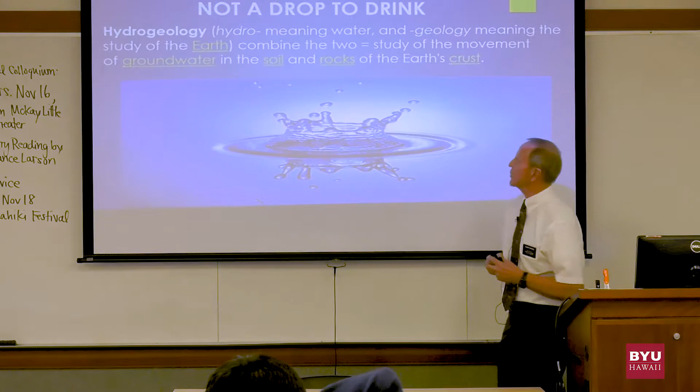Hydrogeology, as far as the definition, hydro is water, geology is earth. So what we're going to talk about today is the movement of water inside the earth.

When Heavenly Father and our Savior created this earth, there was also a lot of planning regarding storing water somewhere usable, in a different form and shape than we're typically used to. So let me go back here.

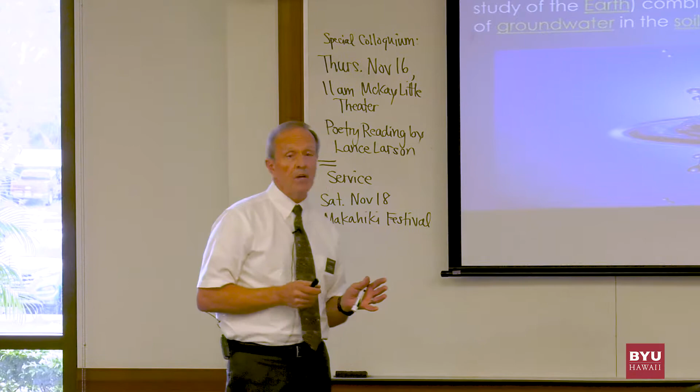Water, water everywhere, not a drop to drink. We have oceans that constitute 80-something, 90% of our water, and that's not really available for all the different uses we have, so we have to have other sources. What happens is we go to underground reservoirs, and we also have surface water.

Here's some terms I want you to remember: cone of depression, water-bearing formations, and drawdown. That will give you some real insight as far as when you're working with underground water, which we call groundwater.

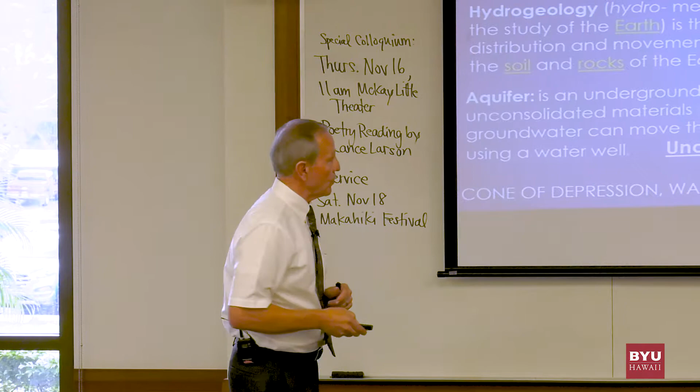There are two main sources of water. You have surface water, and you're all familiar with that because you've been around lakes and rivers and so forth. Then as we go down into the Earth's surface, we have the opportunity to work with groundwater. Groundwater is located under the ground, obviously, with large aquifers.

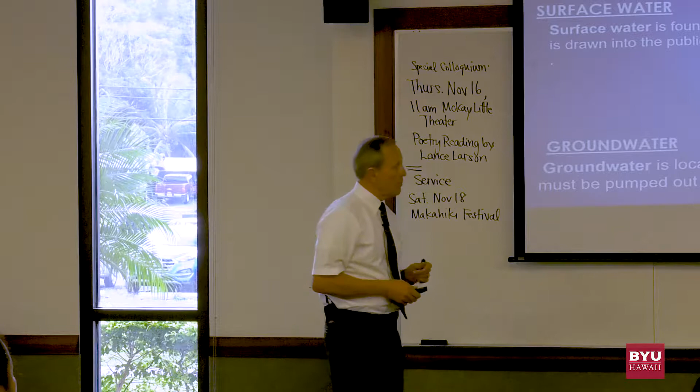You need to be aware of what an aquifer is. Basically, the only way we extract this water typically is by drilling wells into the aquifer and extracting it through a pump. And that's the other issue.

What happens, people, is you have a top layer, then you have your actual aquifer, and then you have maybe bedrock or something they'd call a confining layer. A confining layer keeps the water in a certain place. If it's not confining, that water is going to move wherever it wants to. It doesn't move very rapidly—it can take hundreds of years to move a few miles.

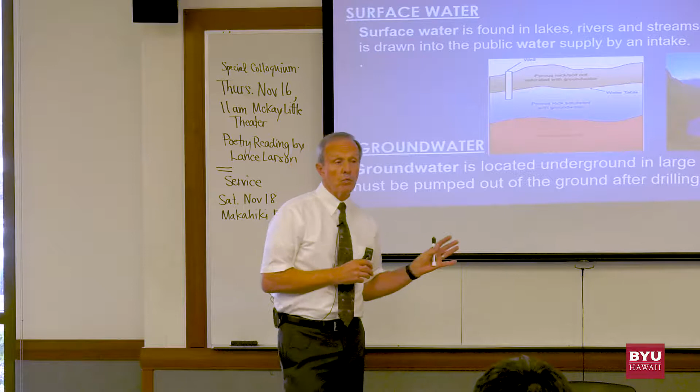This water is stored in the earth in an aquifer, and it moves based on the porosity. What's the porosity? It's how big the openings of the fractures are that the water is stored in. If you have large openings, the water is going to move rapidly, comparatively speaking. If it's real fine, or if you have clays, that's a confining layer—it cannot move through that formation, or it moves very slowly.

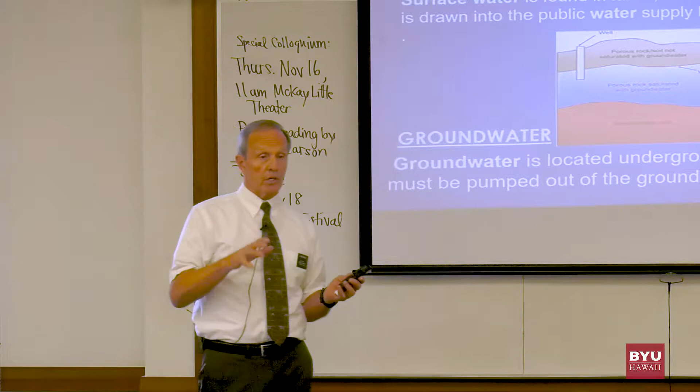So these are things you have to be aware of as you start. What happens in environmental engineering is you have a contamination source. Maybe if you have a plant over here and a plant over here, and all of a sudden this groundwater is contaminated, you have to go and do the forensic type work and say, who is the polluter?

Well, you have to do that. You have to know a lot about the formation. You have to know about the groundwater. You have to know which way it's going to flow or not flow. And then you have to look at the contaminant source—is it going to come from this plant or this plant? A lot of these things are really interesting, because then you get into the legal aspect of it.

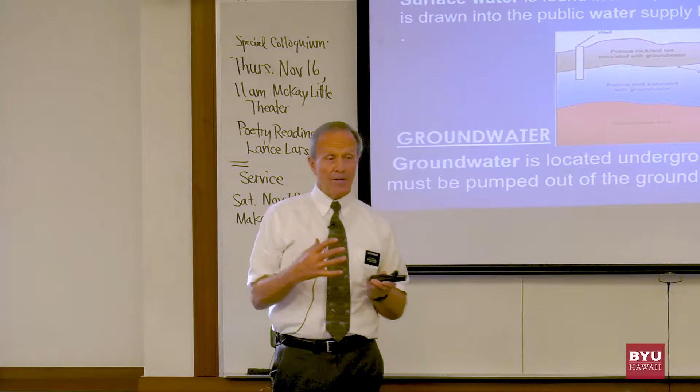You ever heard of EPA? Okay, guess what—who gets to pay? The deep pockets. They go for the people who have the money, because if you have the money, then you can do the remedial action. You can go in there and clean up the source. You can do the remediation to get that source back out of the groundwater, get it clean again, and then go forward.

So let's look at this as far as groundwater. What happens is you have the hydrogeological cycle. Basically, we never lose water, people—it stays here. But what happens is it transforms from one source to another, something that's going to confine it or store it.

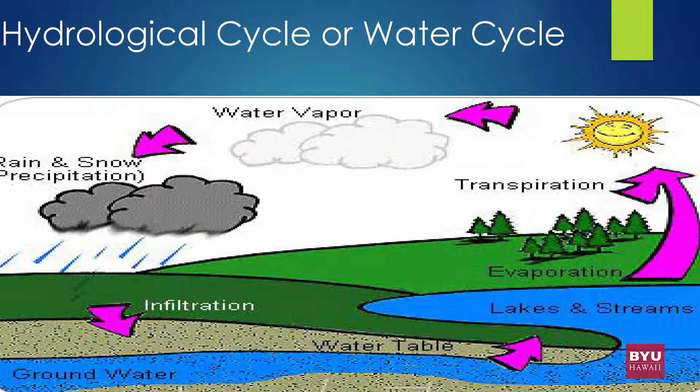We're all familiar with rain and snow, the precipitation comes down, and then infiltration happens. In Hawaii you probably have one of the greatest water sources there is, as far as clean, usable water. Why? Because this filtration is made up of volcanic rock, and as water goes down through this formation it trickles through and gets cleansed.

So it's rainwater. You have a great source anyway, you have a filtration system, and now you have this water stored here, and all you have to do is extract it. That's a great situation where you're living. The water source is fantastic for purity, it's available, and you have large quantities of it. That makes it nice.

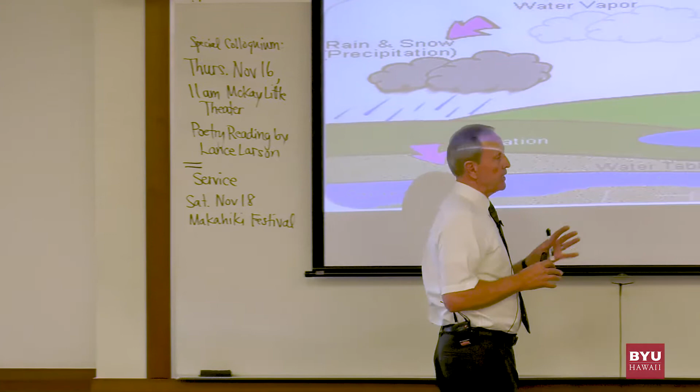Let's talk about some type of water movement where it's actually visibly seen and it starts flowing. What's that called? It's artesian. You ever heard of an artesian well or artesian source?

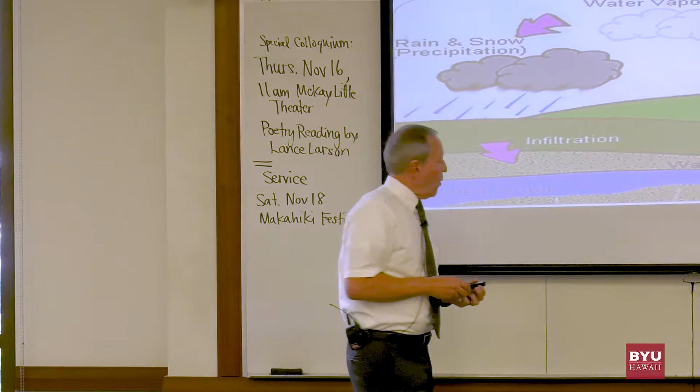What happens in a situation like that is, if you have groundwater stored here, and you have an opening over here, here's a stream you've seen come down. Here's an underground source of water. If there's a little conduit, here's your land surface, this water is stored here. Well, there's enough pressure, and this is a low enough point, so this water begins to flow. It hits an open channel, and all of a sudden you have this little stream that you didn't have before.

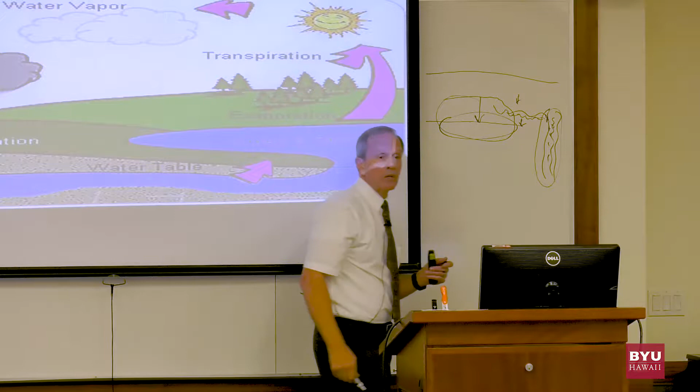Now, if you pump this too much and drop the water level down here, that stream will dry up. So that artesian head you used to have is no longer available because you've dried this source up due to pumping or drought, maybe it just doesn't rain anymore.

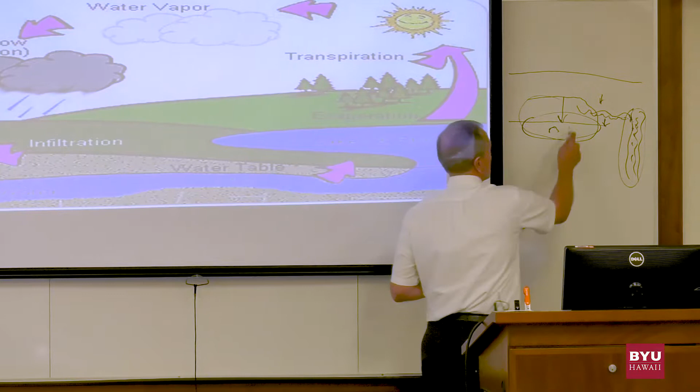This little aquifer does not have, quote, the recharge. What's recharge? That's the amount of water coming into your formation. So if you don't have enough water coming into your formation and you're extracting at a certain rate, pretty soon you're going to dry up that aquifer and it's no longer available for use.

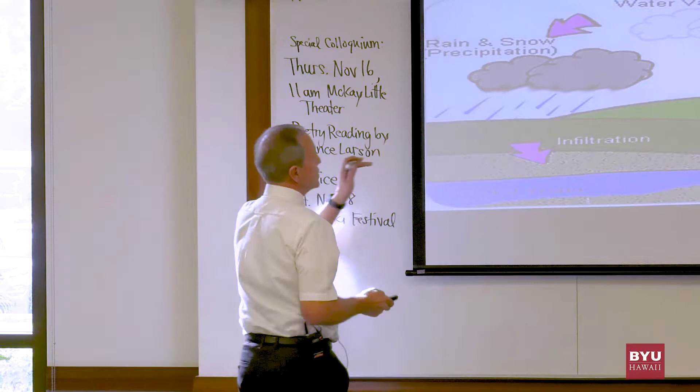So that's what you have to do. When you start looking at hydrogeology, you've got to say, okay, where am I? What do I need the water source for? How much? And so forth. So let's go forward. But that's a hydrological cycle - it lets you see how water really moves from one point to the other, even though we don't lose it.

The 2 M's blessed me and continue to bless all my life. What were the 2 M's? Boy, I better remember that. 3 M's - great job, great job. Boy, don't ever tell me the other part of it.

Okay, 2 M's. One was that you go on a mission, usually when you're 19, and now the girls do too. My academics before I went on my mission were pretty bad - they told me don't come back, put me on academic probation and suspension, so I went on a mission. Thank goodness I had a choice to go there. I came back understanding what I wanted and how to get there - before, I didn't even know if I wanted it or how to get there. This blessed me tremendously - I got back in, made the dean's list, went on to my master's, went summa cum laude. I'm not saying that's the only way, I'm saying you can be successful even if you have issues before.

The second M was a master's in environmental engineering. I went to the plant I worked at for 36 and a half years while getting my master's, back in the 1990s. I came back and gave a presentation to the plant manager where we worked, and it had to do with water. We worked at a coal-fired power plant - if you're going to generate electricity, everybody that turns on the light switch, what do you think is going to happen?

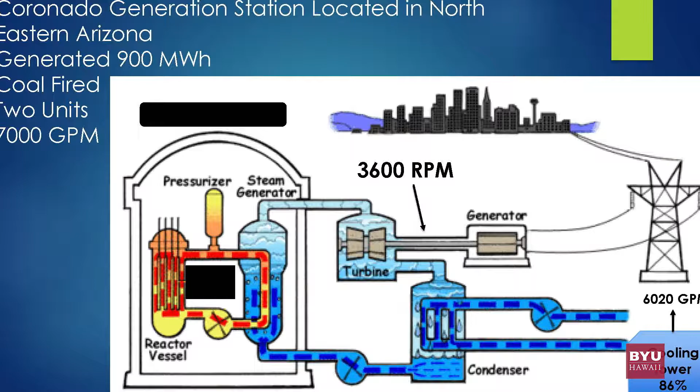What happens is you take water, and we're taking water at about 7,000 gallons a minute. Somebody get a calculator out and give me how many gallons that is in a year, if you would. We're taking 7,000 gallons a minute, heating this water up to a point where it's pure steam.

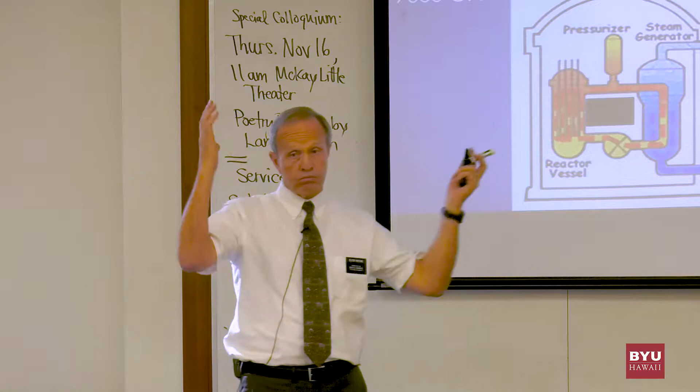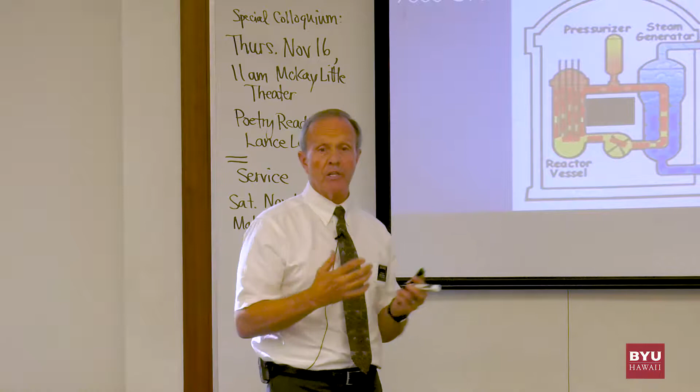You can't have any droplets in steam if you're going to expose that to a big turbine—that turbine will blow up. As soon as the water particles hit those blades, the turbine would come apart. So it has to be pure steam, and the purity has to be perfect because you can't plate material out on your turbine. Otherwise you're going to get a deposit, the turbine's going to have issues, it's not balanced anymore, and that thing's going to go again.

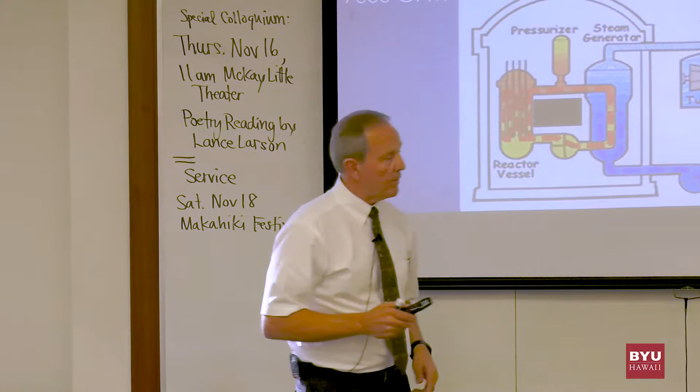So when you start generating electricity at 7,000 gallons a minute, you've got to have pure water. This then comes back as steam and turns this turbine at 3,600 RPM. What's an RPM? Revolutions per minute—so every minute this thing turns 3,600 times.

Why is it turning? Because it's turning a generator. What's that generator doing? It's sending power down that big transmission line that you guys have seen throughout your life, and that's why your lights come on. So it isn't magic—this is all that's happening way, way somewhere.

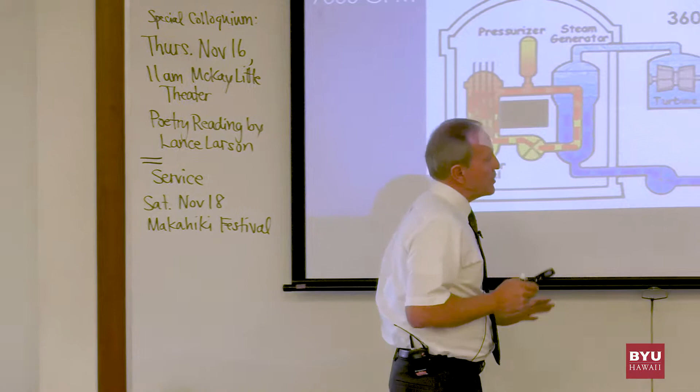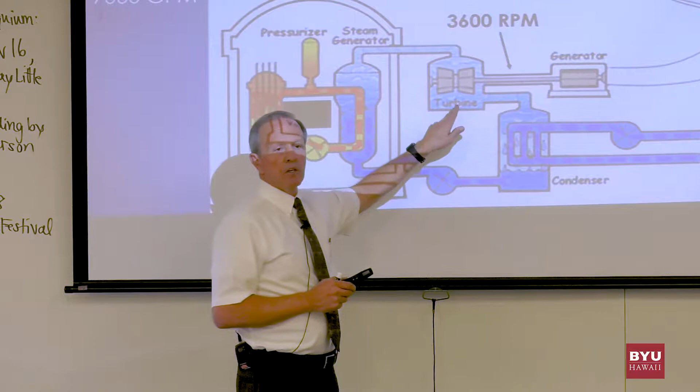What you have to realize too is we're using 7,000 gallons a minute here. You have cooling towers—why would you have cooling towers? Once this steam hits the turbine, you've got to take all the heat out of it and put it back into a liquid. You can't pump steam. So you take all this liquid and bring it back down to a form you can pump, which is water. You have to extract the heat, but you want to do it economically.

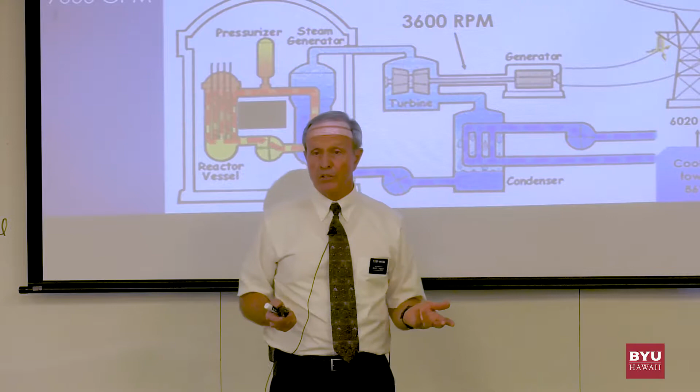Every time you extract some heat, you want to put it back into your system because it took heat for your system to function. So you have to put that heat back in as much as you can, but the cooling towers are taking the heat off, and you're going to lose about 84%, 86% of your water out the cooling towers. You'll never see it again.

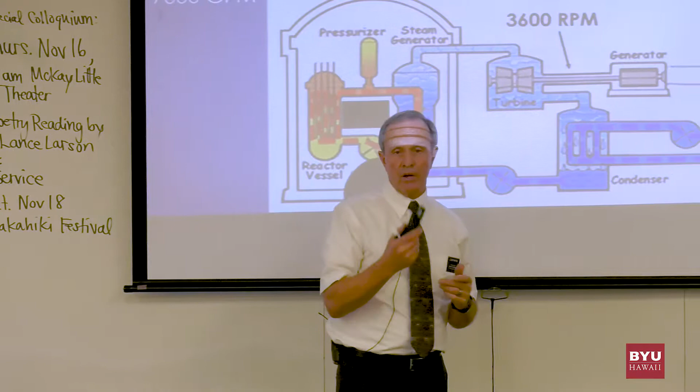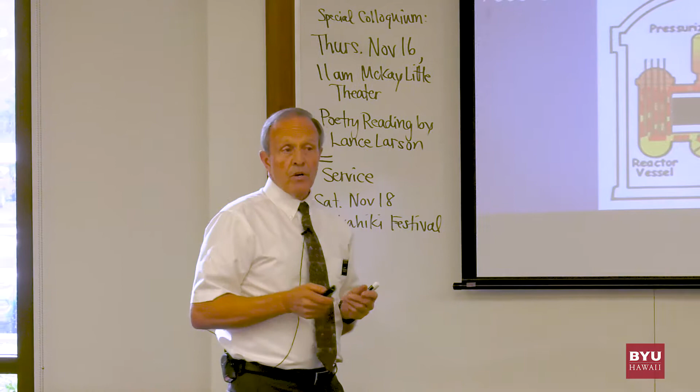So all the time you're bringing in this 7,000 gallons, 24/7, 365 days a year. Would anybody come up with a total? How many billion gallons is that? 3,600,000,000—that's a lot of water, people. If you have any idea how much water is consumed here on this island, we could probably supply that, no problem at all. That's a lot of water.

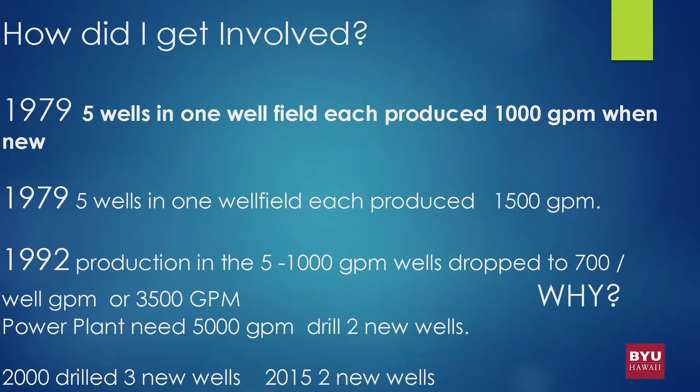Okay, how did I get involved in this? Like I said, I gave a presentation at the plant where we worked. In 1979, we had 5 wells in one well field, each producing about 1,000 gallons per minute. At the same time, there was another well field with 5 wells, each producing about 1,500 gallons a minute. So there was a bit of a difference—this one is 20 miles away, this one was more like 2, 3, or 5 miles away.

What happened over time was—can I erase this for a minute? Okay, thanks. What happens, people, is you start pumping 7,000 gallons a minute out of an aquifer. And like I said, remember these terms.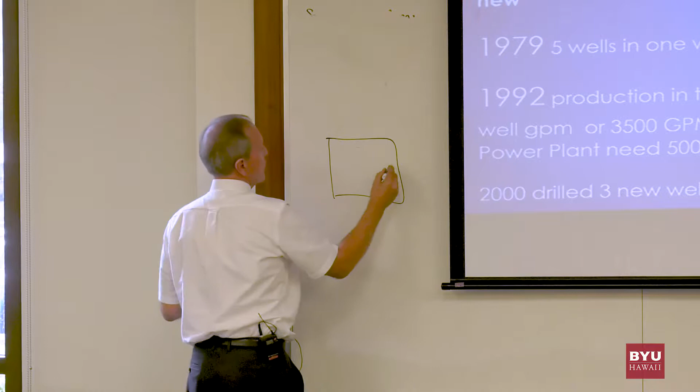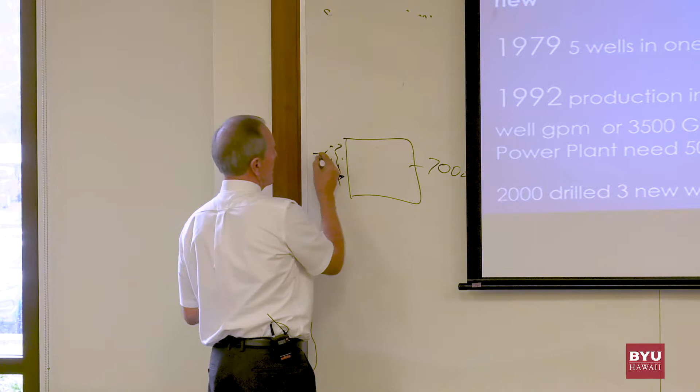Here's your aquifer, you're pumping out 7,000 gallons a minute. In this particular aquifer, in order for water to get through, it's got to come through this formation, and it comes by gravity, because when you pump you create a void. So the void has to be filled. How is it filled? Gravity starts putting water back in as you're pumping water out. If you're not having enough recharge coming into your aquifer, the level starts to drop and drop.

So your wells that used to be pumping water from this level now have to pump from this lower level. These 5 wells up here had a capacity of 5,000 gallons a minute. Then we pumped this aquifer, and this is what we called overdraft.

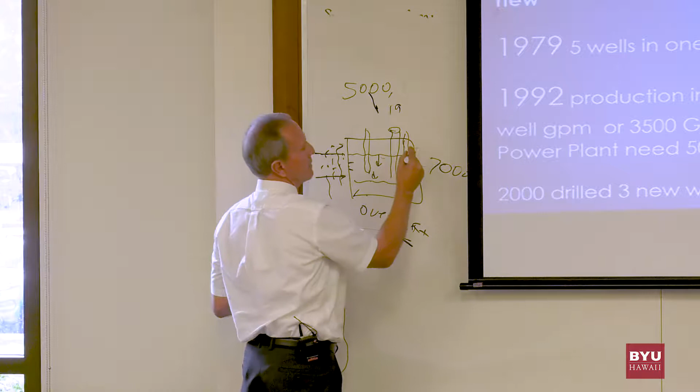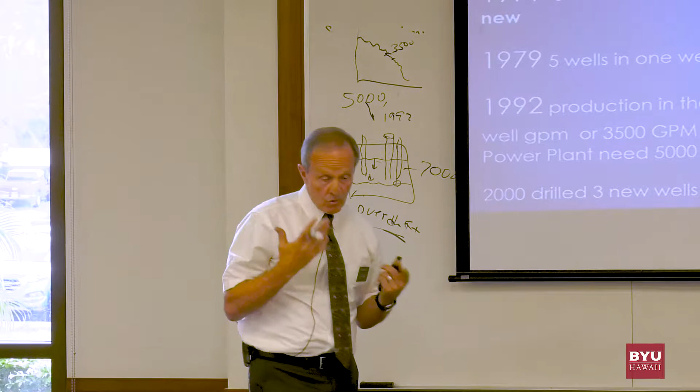The power plant has to have at least 5,000 gallons a minute coming out of this well field. We were going to hit that point, so I went to management and said, hey, you guys better put in another well or two, because we're going to come to here. And when you start no longer producing the capacity your big power plants used to or are capable of, you lose millions of dollars.

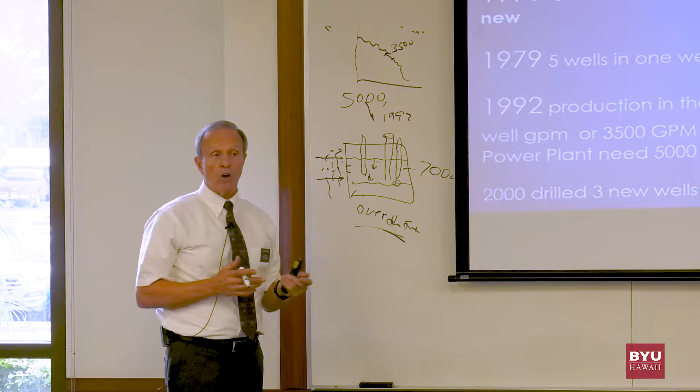It's not just a little thing. These plants produce millions of dollars a day. So if you start curtailing generation and no longer have it, pretty soon that's a costly situation. You can't put a well in a well field in a day or two. It takes years. You've got to buy the land, develop it, drill your wells, put a pipeline in, put a power line in. All these things take time, so you've got to project out.

You've got to say, okay, I need this then. So I said, you guys need it, and you need it right away. Let's start. So we started. We put in 2 new wells, which kicked us back up to 5,000 gallons for that well field. Now we have 7. We went on a bit longer and ended up doing more wells, so we drilled 3 more wells.

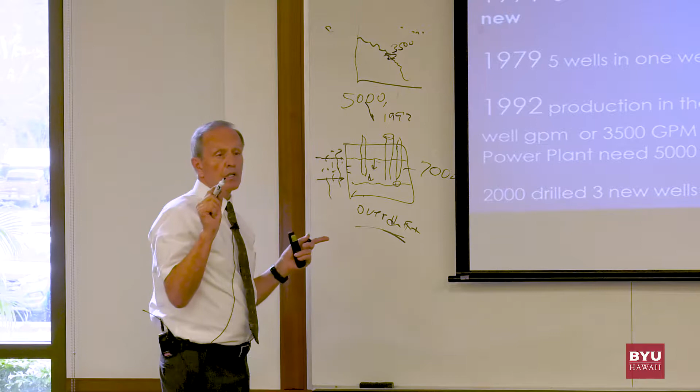The great thing was I was blessed tremendously, because no one knew it - every time we kicked in those wells, we kicked in 2. That was 1992. In 1994, it took us 2 years to do it, and we did the highest capacity factor. What's the capacity factor? That means of your generation.

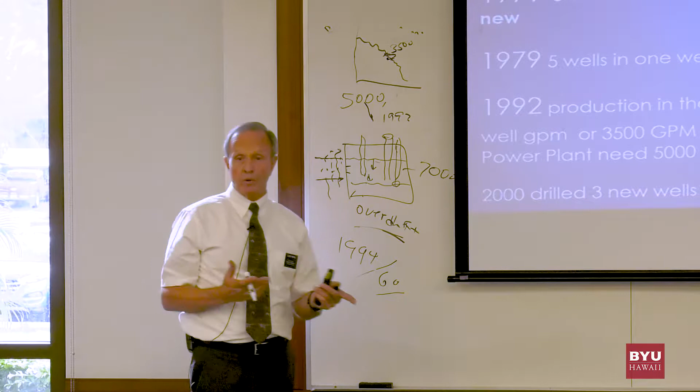We did a 94% capacity factor. We used to run down in the 60s or so. If we wouldn't have had those 2 extra wells at that time, we would have been curtailed in generation, losing millions of dollars. But since we were able to put those 2 new wells in when we were supposed to, there was no issue, no hiccups, no one knew anything about what we did, and we came right back and everybody was fine. That's a total blessing. We drilled 3 new wells that way.

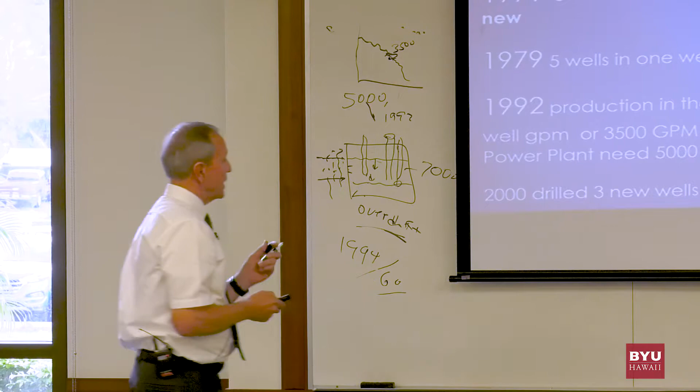So when you took over the responsibility, you'd never drilled wells before in your life, you had no idea what was going on. Then you started looking at the hydrogeology. Here's your land, here's that artesian spring we talked about, and here's the actual aquifer.

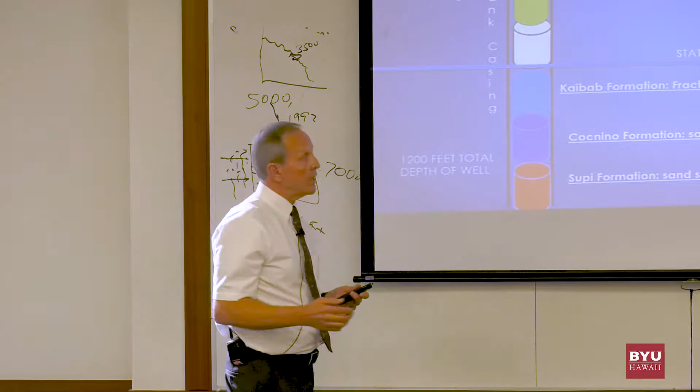So you have to start learning about wells and water. What do you have to know when you drill a well? You have to know your geological formations - if I drill 30 feet, 40 feet, these wells are 1,200 feet deep and produce 1,500 to 1,800 gallons a minute. Before you start drilling a well, you have to know what the formation is, how you're going to drill 50 feet and be fine, or 100 feet, or 2 or 3.

What you do then is start drilling and look at different wells around the whole area - what should I expect in this area? So you start looking at different wells, and what they do when they drill a well is keep drilling logs. Those drilling logs show every foot that they went down through.

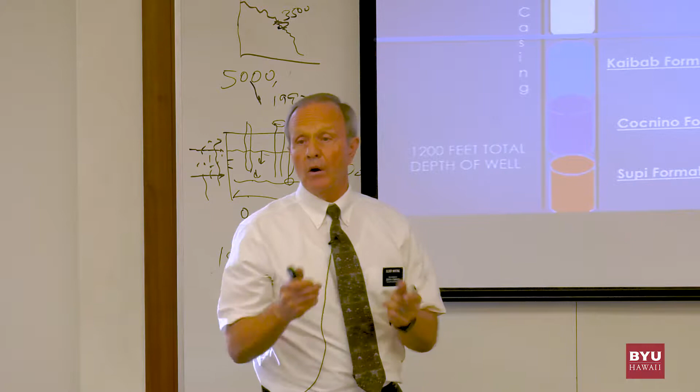They also define the material they hit as they went through. So you go to your neighbor, look at his drilling logs, and say, okay, I know about what I'm going to do. So for instance, where we are, there's a clay formation here. Here's your static water level, about 350 feet. Then you have what they call a kaibab formation where we are.

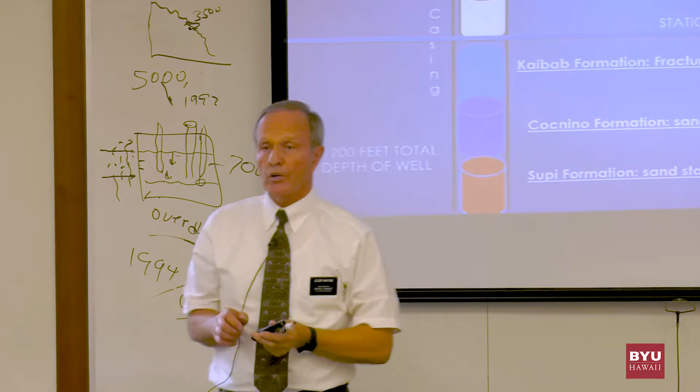It's fractured limestone. Well, the reason fractured limestone is so good is why? Fractured limestone is the key. What do we say about water being able to move or be stored in a formation? Fractured limestone is the best.

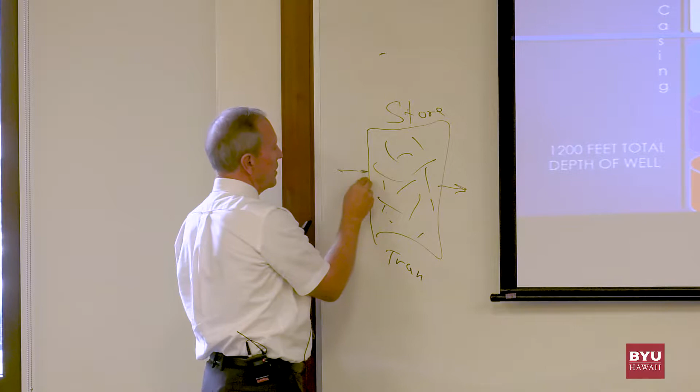So fractured limestone is like this. It has a real great capacity to store, and secondly has a great capacity to transmit. Remember, if you're pulling out too much this way and not enough's coming in this way, it doesn't work as well. Fractured limestone is super because you can store all kinds of water and you can transmit or get out a lot of water. So that was great.

Coconino formation is different. It's a very, very high-packed sandstone. So water getting through that and coming out is a lot tougher. But you need that formation because it is a water-bearing formation. So now you're going to go to here, to here, to here.

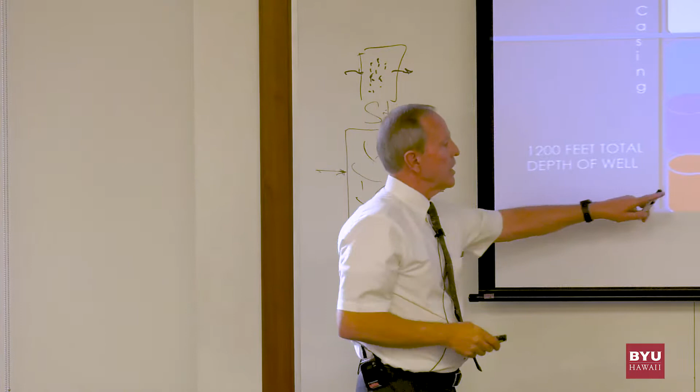The supai - what happens when you drill down to here, probably about 1,200 feet, you hit what they call a supai. The supai is strictly salt. You don't want to go into the supai and destroy your well. So as your well driller is drilling, he hits the supai because he has a conductivity meter, and he knows when he hits that, all of a sudden that meter goes off. So he knows he's hit the supai. They back off, and we do the well.

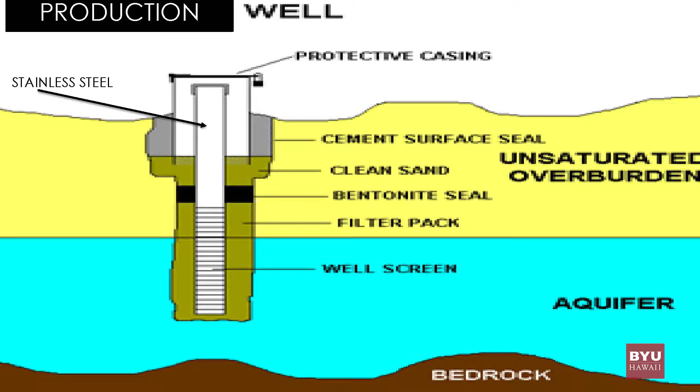You have to build, when you construct a pump or a well, here again, this is your screening. That's an open part, but it's a metal screen so that the water can come through. It's very, very open, but it also has slots and different things. Now this water is able to come through here.

This is solid. When we put a well in at one of these wells, the water was so aggressive - if you put in great big 16-inch carbon steel, then in 2 years you can take it and throw it away. Because that water would eat that up in 2 years. Your well casing was gone.

So what we had to do is go to stainless steel. When you put stainless steel in a 16-inch casing and it's 1,200 feet deep - you don't have to go that deep - you're going to be up to $350,000 just in your casing. But the deal is the casing will last. With carbon steel, you have to throw that out every 2 years and put new carbon in. So it was a lot more practical to put in stainless and let it run for 30 years versus jerking it out. You didn't have a choice.

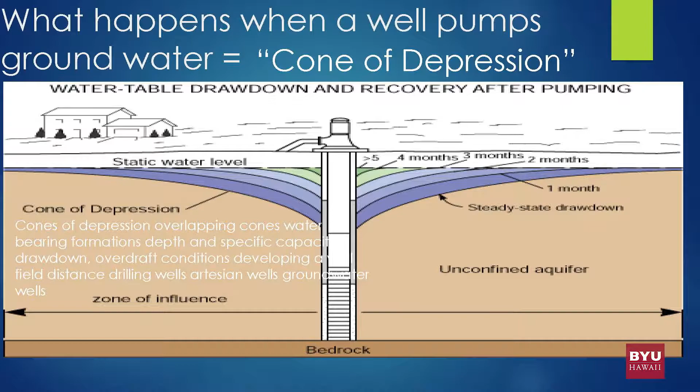Okay people, this is the cone of depression. When you pump a well, first of all, this is your water level. And as the well pumps, it's called the cone of depression. So first of all, you have your static water level. Here's the water sitting down here somewhere in the ground. And then as soon as this well comes on, this starts to go like this.

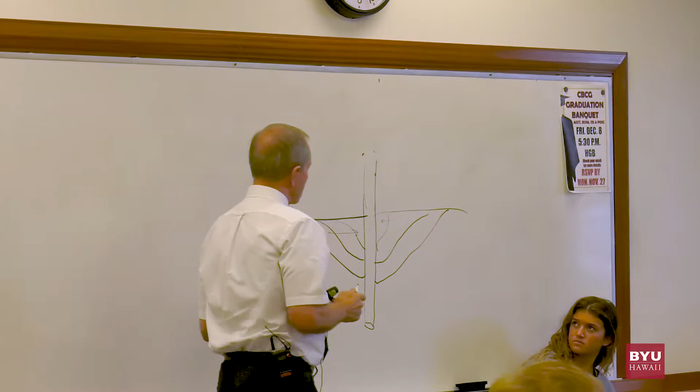This is that void we talked about. Now the water is trying to run into that void because there's a void. And so it continues. Now the longer that well pumps, the larger this cone of depression starts, and it continues to do this. So with that said, you have to say, okay, if my cone of depression is too big, then I have to do something.

Because what happens is you start putting in wells. So you put in one well, but that well then starts to draw. The next well, number 2 - if you don't space those properly, number 3 and number 4 well, they start drawing from each other. And so these cones of depression, all of a sudden, this guy's drawing from him, he's drawing from him. When you set a well field up, you don't want overlapping cones of depression. You want one that is totally independent. This well is independent of that one, and you should not have any overlapping in your cones of depression. So you have to figure that all out, and you figure that out empirically because you know what those wells do in that formation.

Okay, here we go. So what you do then, to properly develop a well field, is you know what your production is.

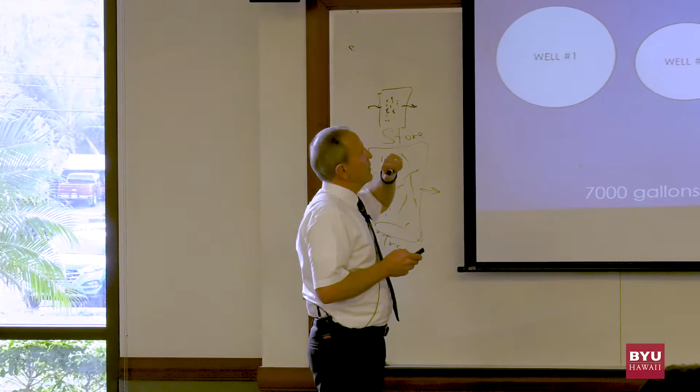You'll notice these are larger and smaller wells. Some are 1,500 GPM, maybe one is an 800 GPM well. So then you say, okay, I need 7,000 gallons - how many wells is it going to take? Then you have to do a spatial relationship, since this one's totally independent of that one. They could be 5 miles apart, 2 miles apart, 3 miles apart. It's not just 10 feet or 15 feet.

You're talking miles, because these cones of depression will be miles long as they start to extract that water. So you have to say, okay, where is this well, this well? And you also need to know what the gradient is - where's that water coming in from? Is it coming this way or that way? Because you want to set those wells so the gradient is up on top and they're all receiving that water from the flow.

Coal-fired power plant again - so I went through this scenario as far as we went from 10 wells to 19 wells. Here's the fun part about it. Then what happened was...

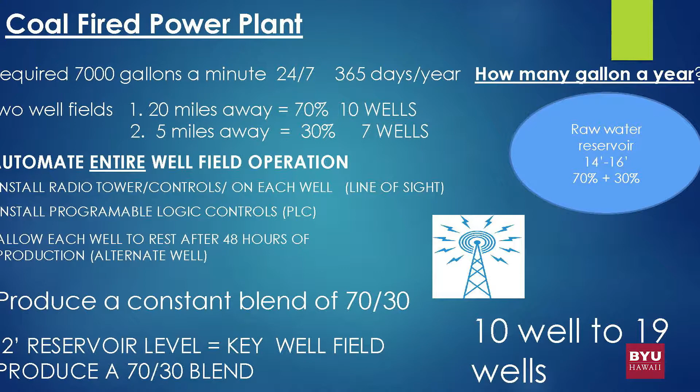So there was this guy named Jay Norris, out of Michigan. I needed some help, so I just went to the internet. I was very blessed, people. You have no idea. Ever heard of Rumpelstiltskin?

What happens with Rumpelstiltskin? As far as what happens with the straw? Turn it to gold. So what happened? He would give him the straw, and Rumpelstiltskin would turn the straw into gold, right?

Well, this is how Jay Norris was. This guy could do things. He never acted like he was intelligent, smart, or anything else, but he could do things you cannot believe. So anyway, I got on the internet, called him, he came out, we met, and I said, let's look at this. I said, what I want to do is automate the entire well field.

Well, what does that mean, automate? That means you know what every well's doing every time. You know where the drawdown is, how many gallons they're producing, you know everything that's going on. You can turn them on, turn them off, do anything you want from your office. So here's your monitor, and you're just taking it all in - it's all right there for you.

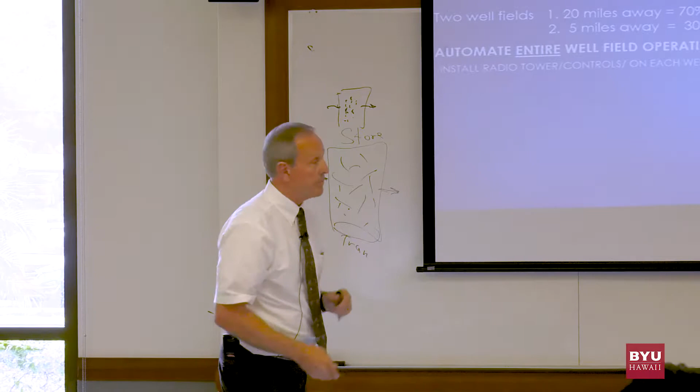So I said, Jay, this is what we need to do - let's install the radio towers and controls on each well. They had to be line of sight. People, where we live there's mountains and hills, so you had to have a line of sight. We had to put in a lot of towers so this tower could see that tower, and that tower could see another, and finally get it back 20 miles away to the plant.

So we did that, and then we said we need all PLCs because it has to be programmable - we need to work with them that way. So we got all the towers and everything in.

Then each well had to rest for 48 hours, and they had to do a cycle, and they had to produce a blend. Only one well field was going to produce 70%, and the other well field was going to produce 30%. So you have all these different things you have to accommodate for - you have to be able to do this, and this, and this isn't even half of it.

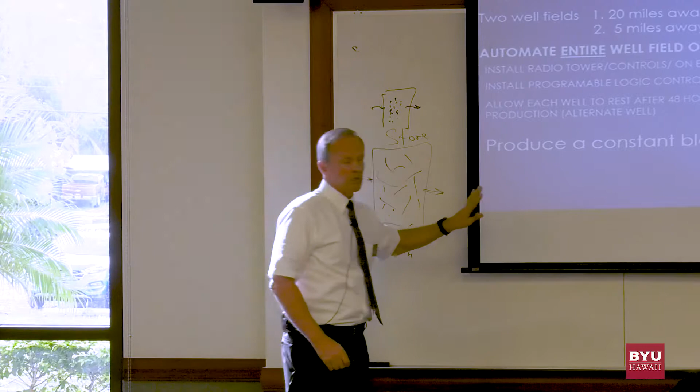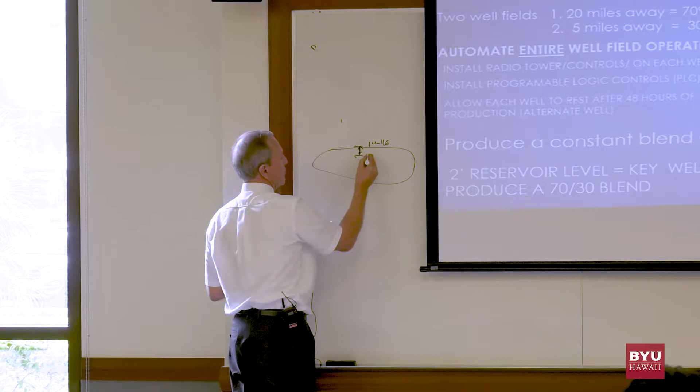And then what you have to do, what we keyed on, and hopefully you'll catch this - what really happened is all your wells pump into what they call a raw water reservoir. You want to operate that between 14 feet and 16 feet - no higher than 16, no lower than 14 feet. So then we set up this great program, people, that was unbelievable.

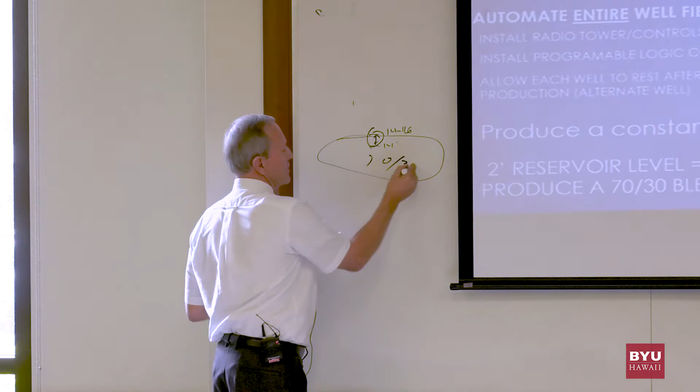Once we automated the entire well field, we set this parameter and told every well it had to come on at a certain time and produce a certain amount, because you have to produce a 70-30 split, so this reservoir can only see 70-30%. You have to keep it within 14 to 16 feet because we don't want to lose water and we don't want to gain water.

So here's all the parameters that we had to set up that these wells had to do. All these little systems you have out there had to start working for you - deciding when to come on, when to shut off, how much water to produce. Who's familiar with a VFD? It's called a variable frequency drive.

Does anyone know what a VFD is? A VFD is nothing more than a variable frequency drive. In other words, you have a motor, and then you have input, and let's say this runs from, let's say, 3,600 RPM. You can tell it to run at 1,400 RPM, and that's going to produce 800 GPM. When you kick it all the way up, it's going to produce 1,500 GPM.

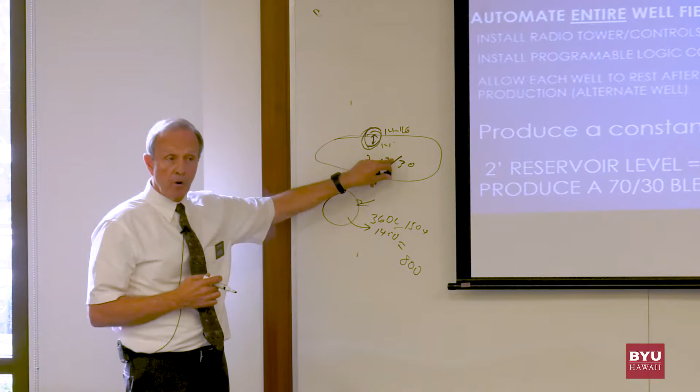So what you have is these variable frequency drives on your pumps. That helped this scenario because now this well could turn off a little bit more, or turn on a little bit more - run it at 3,600, or run it down at 1,400, or whatever the case may be. So all this fantastic automation was all there. I'd get in there, I could look at my monitor, know exactly what the well fields were, see the levels. It was just unbelievable.

So those are things that were really fantastic for this particular situation. Now they said, give examples of things that you love. This was great. You guys have no idea as far as the evolution from nothing up until one of the highest as far as automated and functioning well fields that there ever was. But it was fantastic. Now I'm going to take you one more deal and then we're through.

Okay, I remember that this is how it was. I could look at this. I knew the drawdown. I knew the GPMs. I knew what the pump setting was.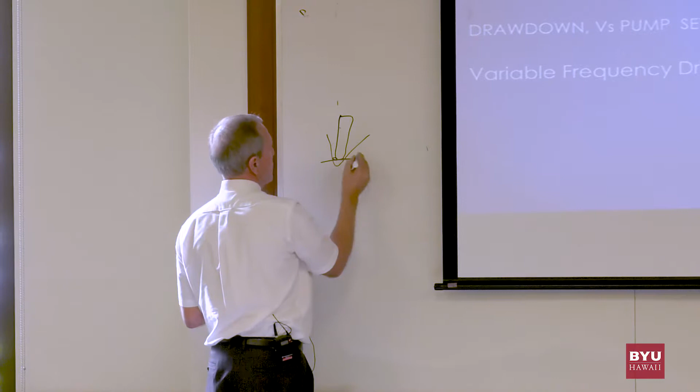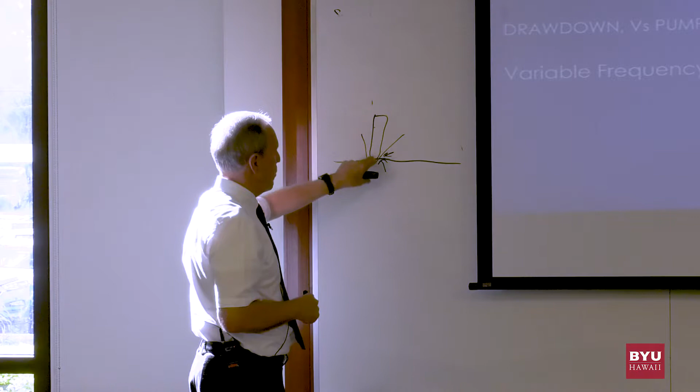One thing you don't want to do is cavitate a pump. Anyone know what cavitating a pump means? When your drawdown comes here and your pump is here, you never want this drawdown - your water in your aquifer - to go this low. If you don't have any water coming to your pump, you blow up your pump. So anyway, I knew exactly where my pump setting was. I knew where the water level was. If I ever had an issue here, I knew it long before that water level dropped down. Everything was there - variable frequency drives.

Okay, this is a fun thing. As an environmental engineer, I worked on a lot of different things, but I also did a lot of mechanical engineering, just because that's where we were in a power plant. So we had an opportunity to do a lot of different projects.

So this is what happened. There's a third point heater. Remember I said the heat that's out there, we want to put it back into the system. These big heaters have tubes running in them. So the steam that's generated never sees the other water that's out here, because this water is cooling while these tubes have steam. So they're never ever interfaced as far as actual water to water, but they're cooling that, okay?

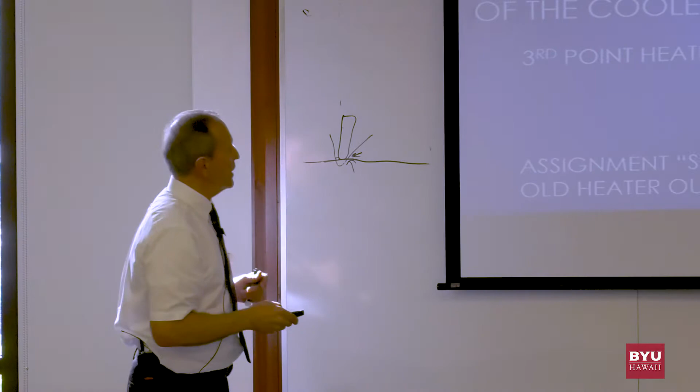So they said, what we need is - your assignment - I want you to take this, because these wear out after a while. You're plugging tubes all the time because they leak, and pretty soon you plug so many tubes in that huge vessel that it no longer functions as a cooling vessel. Then it's no longer efficient and you have to jerk it out. Well, when they built a power plant, a coal-fired power plant, the life expectancy was 30 years. So when you put a great big vessel that weighs 80,000 pounds, you didn't think it would ever need to come out, because the coal-fired power plant was only going to last 30 years anyway.

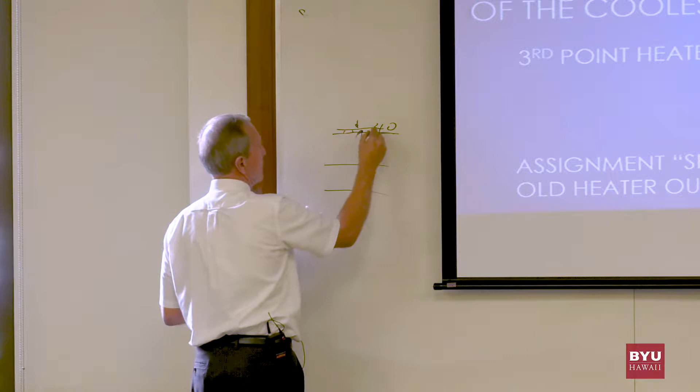So what these guys did - this is your ground level, and this is sitting up here 40 feet in the air. Not really in the air, but 40 feet from the ground on this grating. And here's this vessel - well, they put it so far back in there that they thought, how are you going to get these out? We had to cut out huge steam headers. We had to cut out this, we had to do that just to even start to get this thing out. So they said, get rid of that and put a brand new one in. And so that was the challenge.

I had 2 weeks to do it because you have a shutdown. A shutdown means the whole plant comes down, you do all your maintenance, you do everything you can, and get ready in 2 weeks to bring the plant back up, okay? So then we said, okay, that's your assignment, Elder Whiting, get it done. You got 2 weeks to do it. Well, that takes a lot.

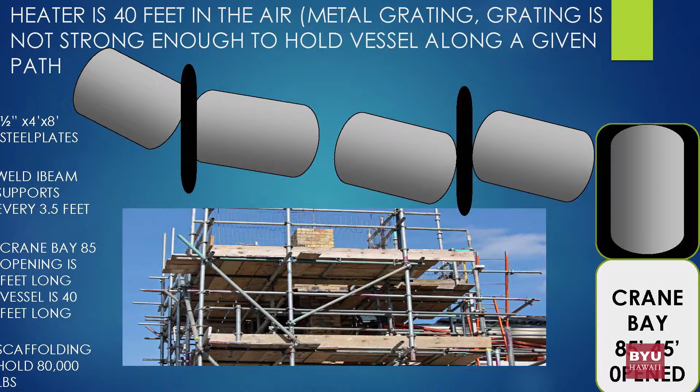So we said, okay, how are we going to do this? First of all, where the heater was sitting was reinforced, but everything around it was no longer reinforced on the ground because it couldn't hold that much weight if you moved the heater from its original place. So you had to reinforce a path. You had this great big path that you had to take to get that heater out of there.

Well, so what happened was, here's your pipes, here's your pipes, this is the path we were going to take in. Then what happened is we came to what we call a crane bay. A crane bay is an opening, and there's a huge crane that can come down and grab that big vessel and put it on a big truck and take it off the plant. But you had to get it to the crane bay.

Then the crane bay only had a 45-foot opening, so you're restricted because you're going to use 40 feet. You can't bring it all the way out here because the crane only sits this far in. Does this make sense? Your crane can make a pick here, but it can't make a pick there. So you have to move this vessel out far enough to make a pick. That's what we call a pick, just lifting it.

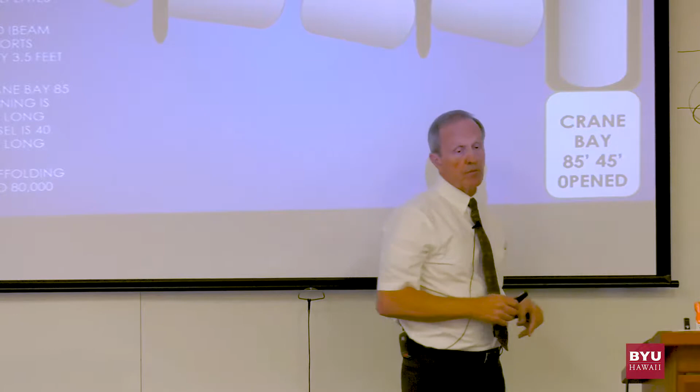So anyway, so this is what happened. So then we said, okay, we had to build just 4x8 steel plates. We had to put those big plates down. We had to reinforce the entire floor because if that vessel comes across there, it'd go down. So we made half inch thick, 4 foot by 8 foot plates, and all of those were under here, so we could start moving that.

We welded I-beams, the crane bay and so forth was an issue. We had to have scaffolding, people, right here, because we had to push this thing out so we could make a pick. So now you had to build scaffolding that was certified so that it would hold 80,000 pounds. This was huge.

Then, like I said, the heater stuck way back there. Typically you use tuggers. What's a tugger? It's a pneumatic winch, is all it is. So you use these big tuggers and you just start jerking on that big vessel, just a little bit at a time, and you finally try to get the thing out. We had to make movements and everything.

So what happened was, I said, okay, I've never done this before, no one else has ever done it, but we're going to use airbags. We're going to float this thing out of here. Oh, everybody thought, oh, sure you are. So anyway, I said, okay, and I've never done it before either. So we built these shoes, and these shoes were going to go on this great big vessel.

We put these airbags under here. I did the research, everything should be fine. We've never done it, so I told the welders, build these shoes, put this on this vessel. We got one shot at it. We hope it's going to work. Oh, my word. So anyway, we put those on there.

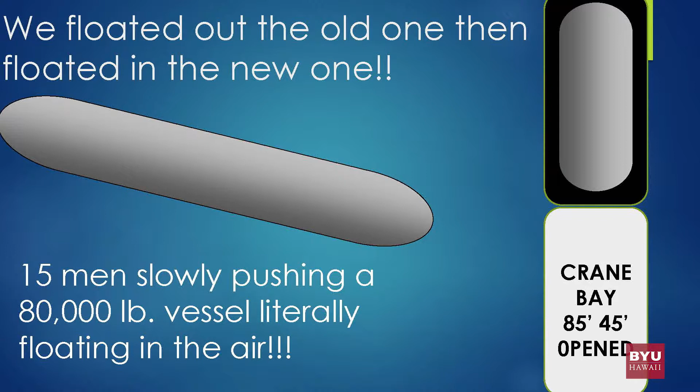Underneath, you have to get to that scaffolding. So sure enough, that big old vessel came up in the air like it was supposed to. We had 15 men moving it, and literally it was floating in the air. We brought it over to here.

We put it on the crane bay, got it over there and made the pick. That big truck moved the old one out, the new one was there. We pulled the brand new one in, made another pick, took the shoes off of the old one, welded them onto the new one, and then put those airbags on again and walked that great big vessel right back where it was. Turned off the air, we're done.

So anyway, there are some fun things out there, you guys, that's really neat. That's called thinking out of the box. And like I said, I've been there for years and years, probably 30 years at that time. There was another engineer who was with me.

Anyway, these old welders who worked around big old welders, tough old guys and all that good stuff, right? All manly, man, they spit on the floor, do all those manly things, right? But anyway, when we got to this point, and it was the first time ever, they let out a yell like, yeah! So anyway, it was a neat thing. This one engineer said, I've never seen anything like that. I've been here 30 years, as far as just the enthusiasm that went along with the deal.

So anyway, just as far as things that are going on out there in the world and the opportunities it makes, education was a fantastic situation. My biology degree was a stepping stone only. My master's degree is what opened it up for me. I never left that plant for 36.5 years, but it opened doors that never would have had that opportunity.

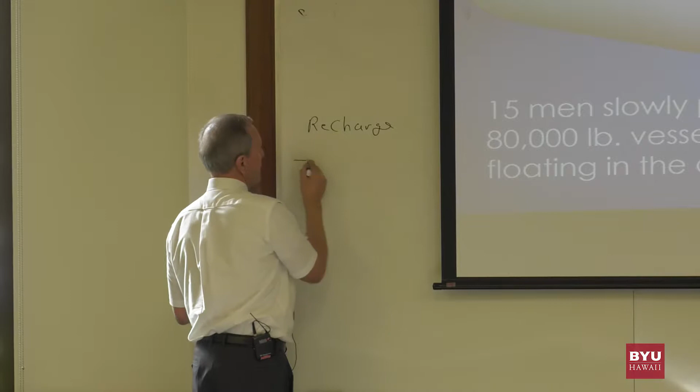Well, that's a real good question. What happens, again, is recharge. Recharge is the amount coming in to an aquifer. And if your recharge is not sufficient, then you're going to have what they call overdraft. Overdraft means the same thing, basically: your recharge is less than what you're taking out, so you're depleting the aquifer.

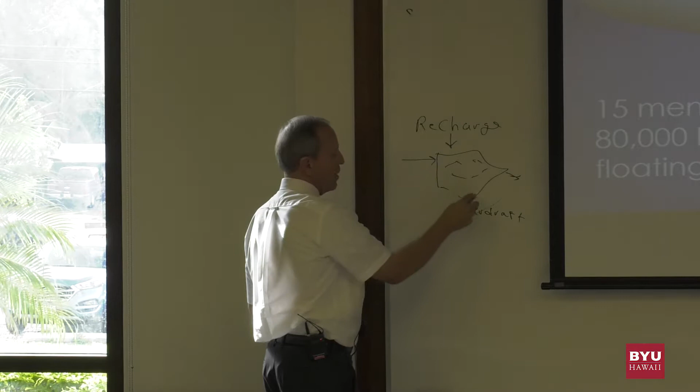There's no other way to actually recover the aquifer unless you stop that and allow it. And again, it takes a long time for the aquifer to come back because it has a lot of restraints. It's running through a formation, and depending on the formation, how fast is that water going to travel. Sometimes it travels just a few feet in a year. So it's hard. People throughout the world right now, water is a huge issue.

If you want to go into environmental law, go to water litigation. That's going on all the time. And your point's very well taken. When you have cities and so forth, and they come in and they start drawing on this aquifer, just like at the plant, everybody said 10 wells would be sufficient and you never have to worry about it again.

Well, we ended up with 19, and we're still barely making enough water with a little bit of spare. People do not project and look at capacity versus what they're using. So you do have that situation where you have a real problem. You have this big city dependent on this water, and now you don't have the means or the ability to produce it. So they do start looking at it, and it becomes very, very critical.

But there's no real fix. The only fix is nature, and the ability to transmit water in at a rate greater than it's being extracted. Otherwise everybody has to go to rationing or some other means to let that aquifer recover. That's really the only solution when you're talking about depletion of aquifers—you have to curtail the amount used.

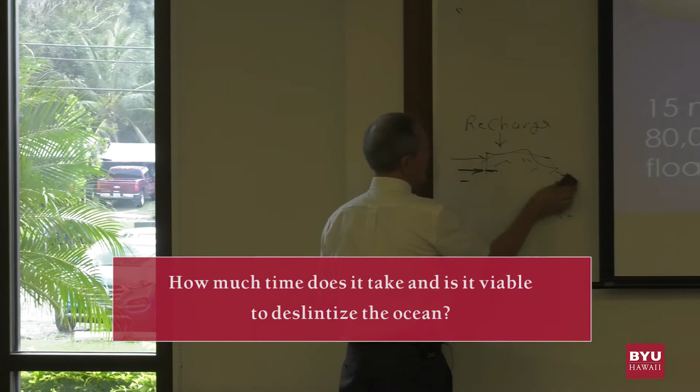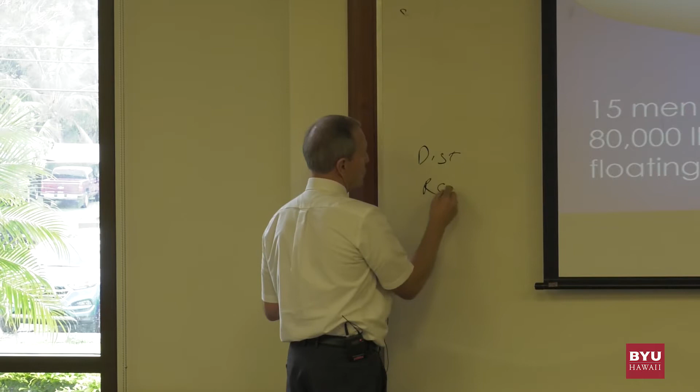Well, that's a really good question. You do that when you have to. Desalination is taking all the salts out of the water. There are a couple of means to do it—you can do it through distillation, or through ROs, which are nothing more than filters. RO, that's how you do it.

So, state your question again—desalination. So what I was saying is, the city I lived in for a while had a desalination program with several plants. I know it's expensive, so what I wanted to ask is, is it viable for people here?

Okay, very good question. He's saying, why don't we use desalination since we have a huge ocean out there—let's go ahead and capture the water, I think is what he's saying. It's a very good question. But why aren't we? Well, number one, the reason is we don't have to. And number two, like you said, it's very expensive.

When you start doing ROs, you're only going to get about 50%. So if you put in 100 gallons a minute, you probably get out about 50 gallons. The other 50 gallons has to be thrown away because you're concentrating the salts—the salt you're trying to get rid of passes through a filter and becomes a slush. So it's very expensive, these RO filters. The return is only about half—you put all of it in, you get half of it out.

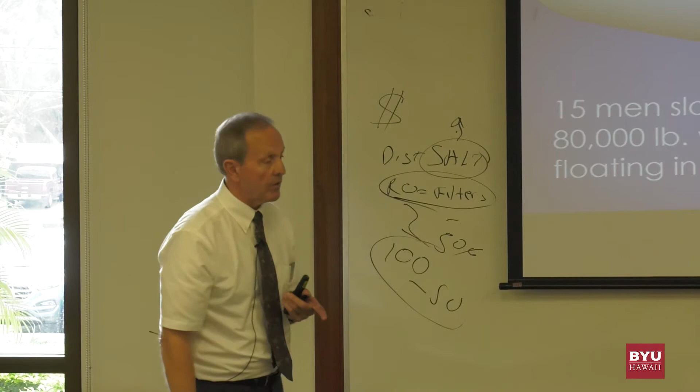So your point's well taken. In those situations, they say we have to—we don't have any choice. So they say, okay, we know it's terrible as far as the money associated with it, but we have to do it. There's no other way we can survive without going through desalination. Does that help explain it?

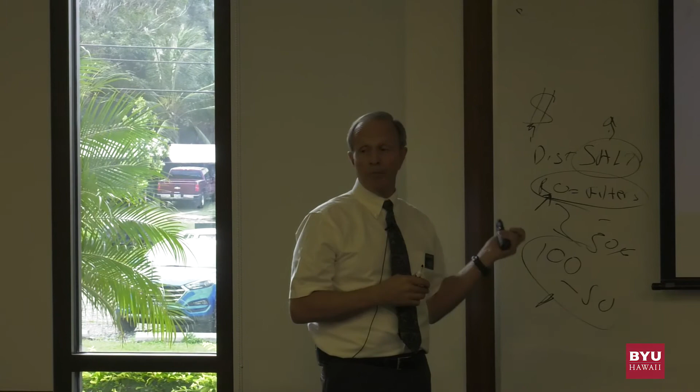And that's why we don't do it here, because we don't have to—we have the greatest water in the world, the cleanest water in the world, all the quantity you want. So in our particular situation, it wouldn't merit anything like that other than experimentation. If somebody wants to do the research, they could set up desalination and go that way, but there's no necessity based on need and consumption. Does that make sense? Okay, people, thank you so—oh, excuse me, one more.

You're from Arizona? Arizona, what part? Northeast, St. Johns. So you have some male relatives who used to have a gas station chain? That was my grandfather and my dad. Okay, my mother grew up with them. Oh, did she really? Yeah. Yeah, no, it's fantastic. So yes, that takes us right back. But yes, Arizona, yes, that's where we were.